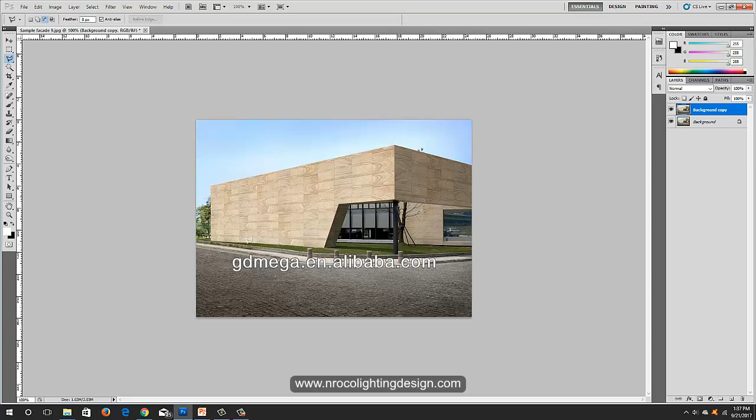Before you make it dark with Control L, let's cut this wall first where we will do our wall grazing or wall washing. Press the lasso tool again, or L, and then start cropping it.

This one, okay. And if there's grass and it's uneven, you cannot crop it straight because there's grass here, so just first cut it there like that.

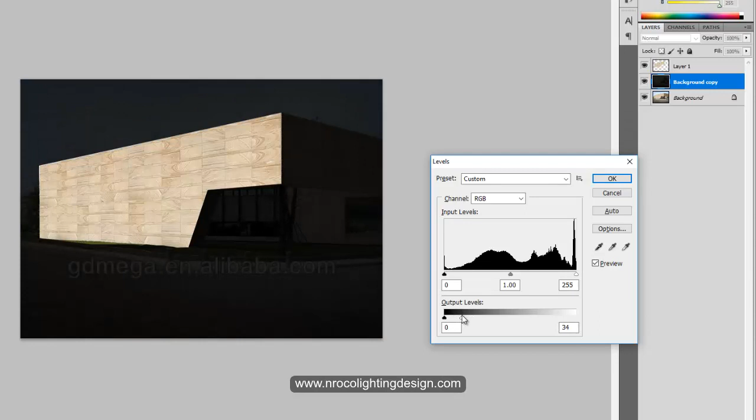Copy it, so now it's a new layer, and then Control L for this background copy so it will be dark now, and slide it again. Let's slide it like this only, and now you can see the grass is visible in this cropping, so let's crop it.

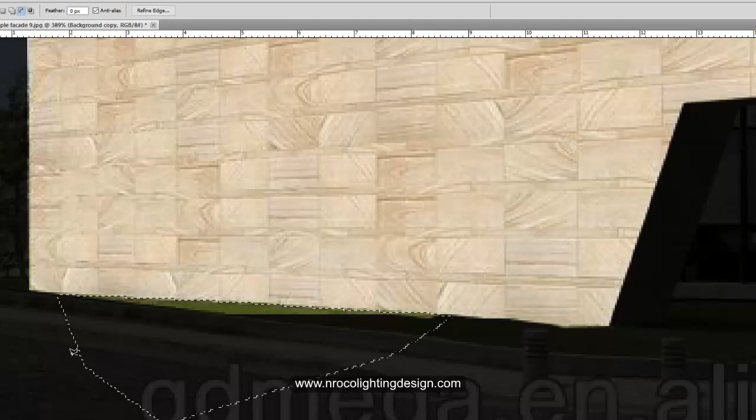There you go, okay, that's it, then close and delete. Oops, I'm in the wrong layer - see, I'm in the wrong layer, so Control Z, go to layer 1 and delete, then Control D to deselect, and then zoom out.

Now you have your wall ready for wall grazing. So create a new layer first, then press the lasso tool and create an imaginary line of light here - imagining that your linear floodlights is below this.

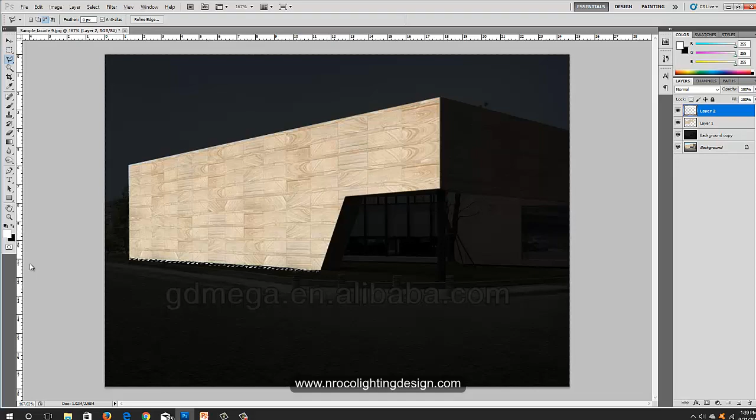Then Control delete, or Alt delete, to fill it with white. You can see now it's filled with white, and now Control deselect.

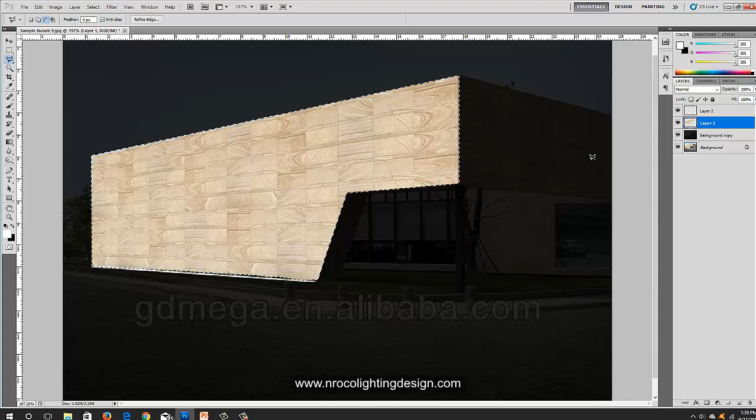Now this is your imaginary linear floodlights on the ground, and then select your layer 1 again, and Control press the tab. Now it's selected, and go to your filter, render, lighting effects.

So there are so many ways here - now there will be five lights up, you can see. So let's try this one.

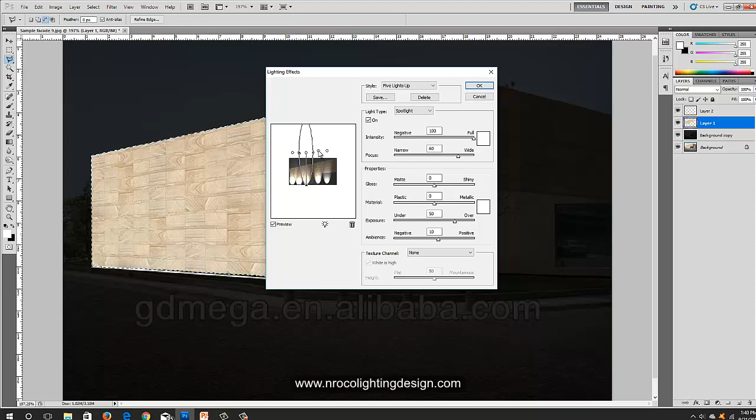Let's imagine this is uplighters instead of a linear floodlight. You need to arrange it properly so it will be close to each other and create the amazing effect. If you want to add more here, just press Control Alt, select one, and drag it there - now you have one more, then press OK.

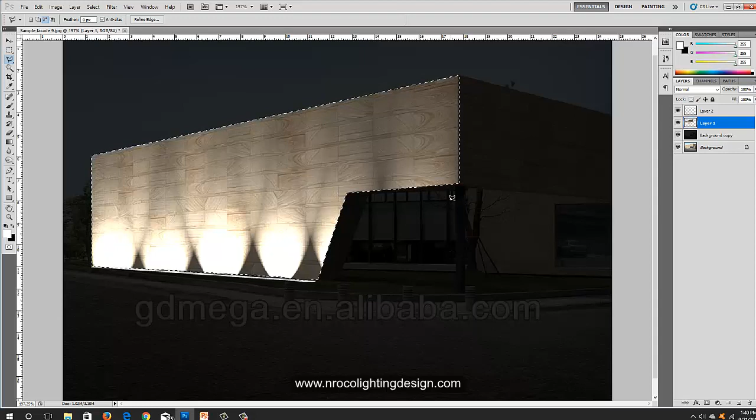So this is an ugly uplighters, and this is not a wall grazing properly. What we're going to do is we need to have even wall washing on the wall. So let's Control Z, and then go to the filter again, render, lighting effects.

Select the floodlights instead of the five lights up, and then rotate it there, rotate, then increase the size of the diameter, and increase it there, place it properly.

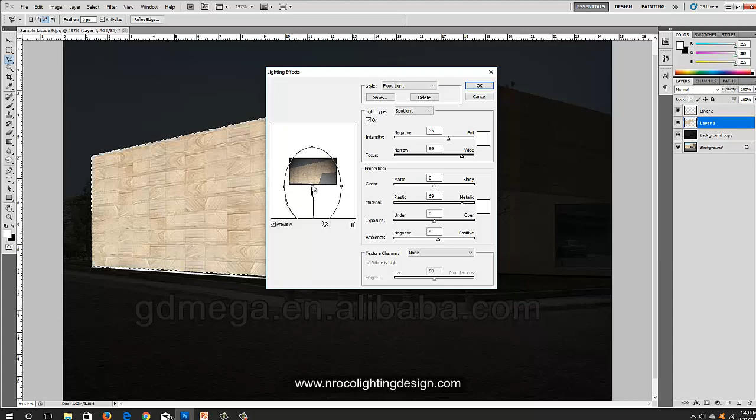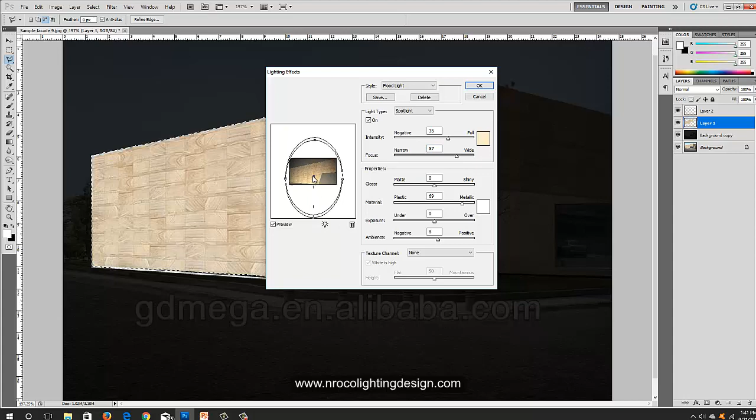If you want to have a little yellowish, select the color and press this yellowish color. And if you want to make it more yellowish, adjust it, then make this narrow beam a little narrow so it will be focused on the ground only. So it will look like this, and then press OK.

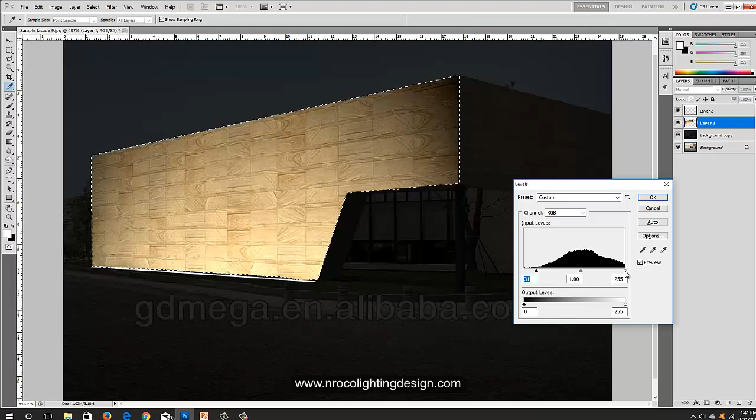Now you can see there is light on the ground, but it doesn't create much light because it looks like it's just lighted from somewhere from the bottom.

So Control L to play with it, and drag your cursor here to make it more brighter at the bottom. Then make your layer 2, the one you created with light, with a glowing effect. So fx layer style, then outer glow, and create a glowing effect.

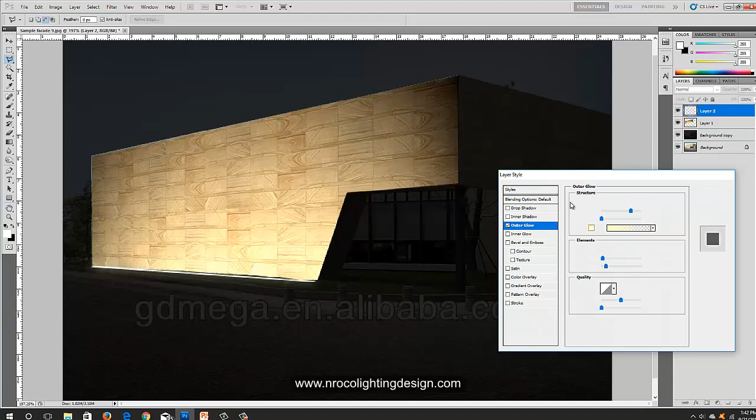It will also have a spread of light on the ground. You can see there's a spill of light on the ground, because in actual there will be spill light on the ground as well. Increase it a little, maybe 3, and then press OK. Now you have your simple wall grazing.

We will continue with another project later.

So I have another project here, let's open it in Photoshop, copy it, and before we make it darker, let's crop this wall using the lasso tool. There's a small step up here, and we have to make sure the doors and windows in this facade are not included, just copy only those areas that need to be highlighted.

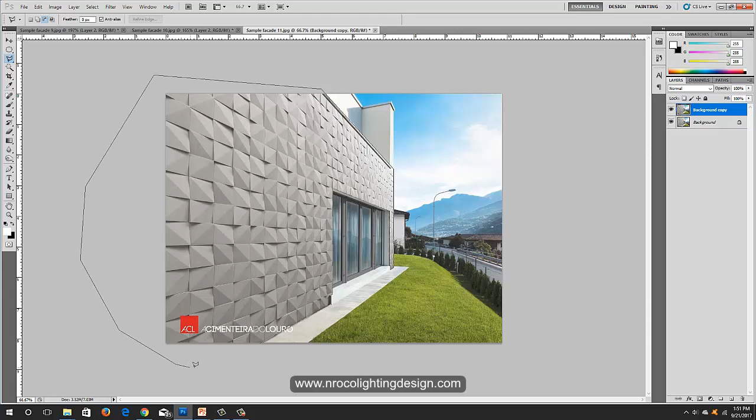Okay, so let's go around and round, and then just copy. I close it, right click and then copy. Now we can Control L this layer, and make it darker.

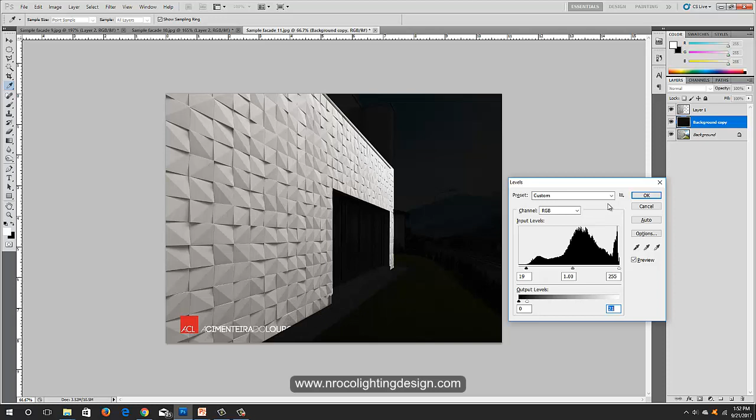Okay, so it's now ready. We can now put these linear floodlights at the bottom. Let's create a new layer, press this one, and name it linear flood if you like, then go to the lasso and create your linear flood here.

So just imagine the thickness of your linear floodlights. Then close, and Alt Delete to fill it with white in your foreground, and deselect.

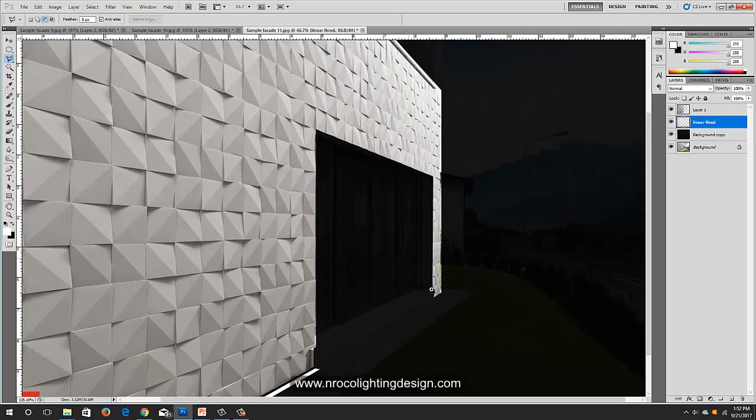Now you can wall graze this one, but since there is nothing here at the top of this one, and here there's another one, we need to add one more. You can zoom by pressing Control space bar, then drag your mouse there and create one more.

Let's make it smaller, and then press Alt Delete. Alright, there you go. So we have linear flood here.

So if you want to zoom out, Control minus, and if you want to zoom in, Control plus. Okay, these are the shortcuts.

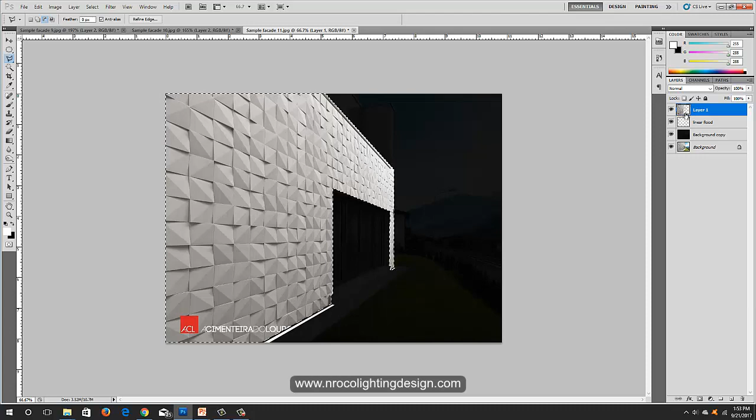So now go back to layer 1, and we need to highlight it or wall graze it now. So Control select the top thumbnail, then filter, render, lighting effects.

So now the one we use again is the uplighters, and we will go back to the floodlight, and it will be from the bottom, so we will rotate it, then increase the size of this round.

There you go. And because there's another one on the other side, we need to crook it a little like this, and increase the light value here, make it wider.

There you go, more wider. Yep.

And then let's go and copy this one. By pressing Control Alt and then click and drag it there, so we will have another light on the other side, and make it slimmer because that side has a small wall facade.

So you can see that the two light beams are integrating. Make sure it's not that obvious, or you can blend it together like that.

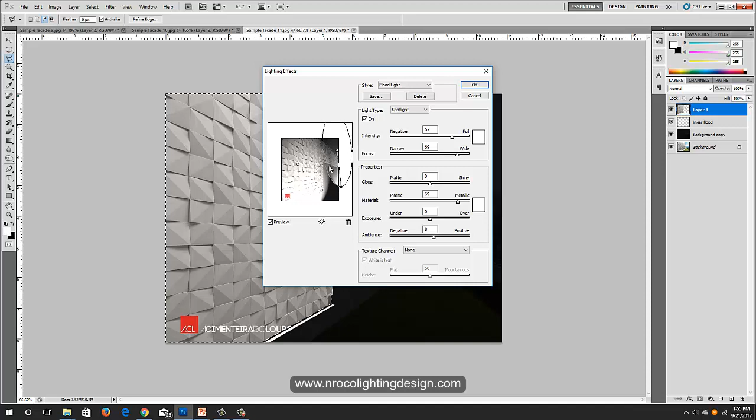And there you go. So let's see and check first how it looks, and then press OK. Now it will look like this.

So it looks good, but if you want to add colors, you can do so by maybe using a warm color or blue color or any other color. So that's it. See you again later.